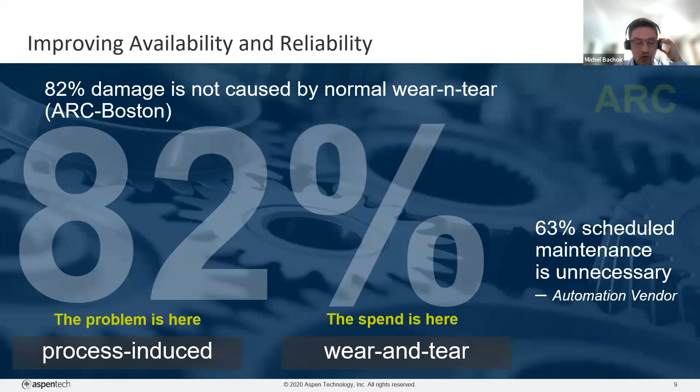Furthermore, it has been suggested that 63% of maintenance is unnecessary and can cause more damage than if the equipment was left untouched. Another way of visualizing this is by looking at this PF curve. The idea is to catch the problem before it reaches the P point, or the point of no return, as I call it. Having a stable operation will minimize equipment breakdown due to process upsets.

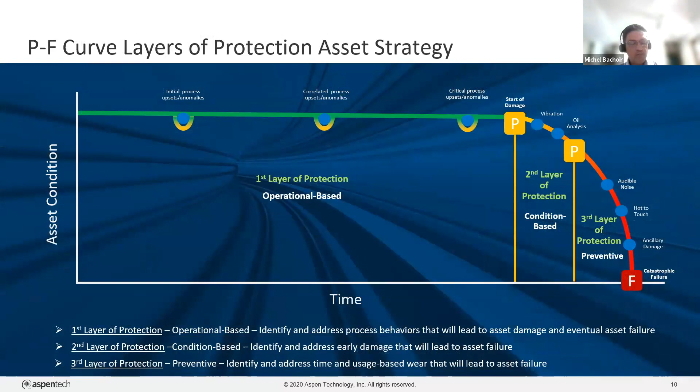How can Mtell alert you that these issues are happening? Mtell uses agents. Agents are automated software components that perform machine learning. They look for specific patterns in data that show normal and failure behaviors. They will alert when changes in these behaviors occur. For example, we have the anomaly agent, which learns what is normal and alerts when the sensor's pattern behavior is outside this normal. On the other hand, we have the failure agent that learns a specific signature and provides early warning when the pattern is identified.

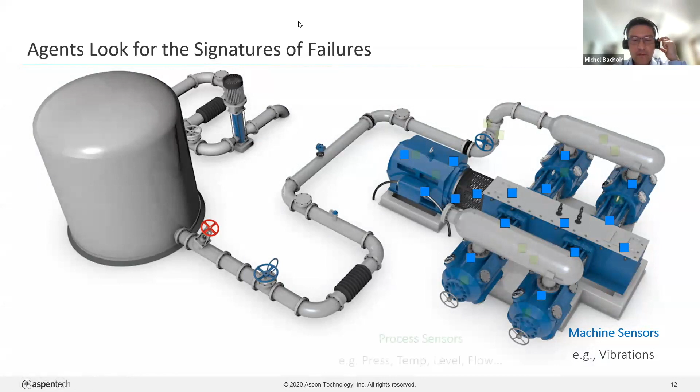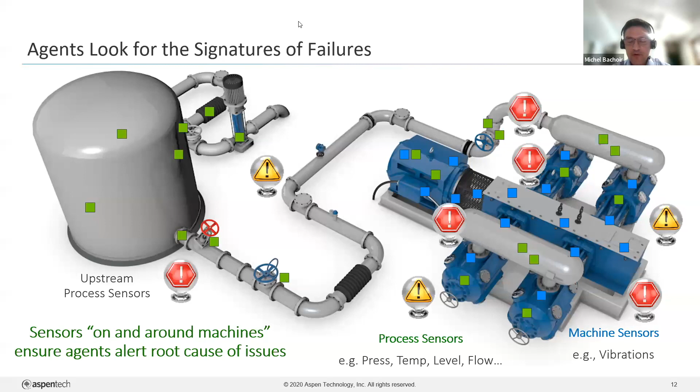So how are these agents created? Mtell uses machine sensors, process sensors, as well as upstream sensors in a holistic approach. Then Mtell gives you the flexibility to create groups of sensors to target specific areas of your equipment, such as the motor or the cylinders, or even equipment upstream. With those groups, you can create and train failure agents to protect your equipment from various known failure modes, and anomaly agents to protect against any process upsets and never-before-seen failure modes.

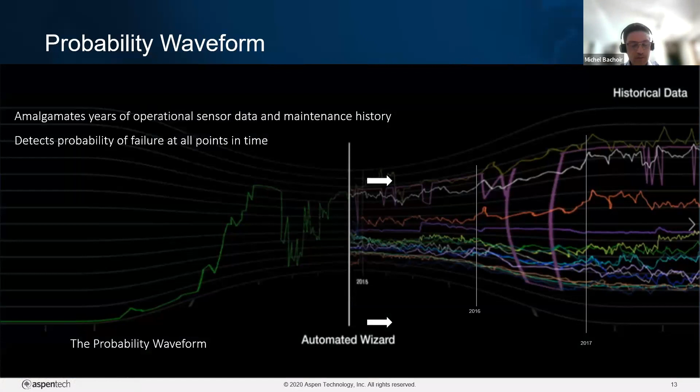So this is the approach of Mtell. Mtell amalgamates sensor data to create a probability waveform, as you see on the left. This waveform shows the probability of failure at any point in time.

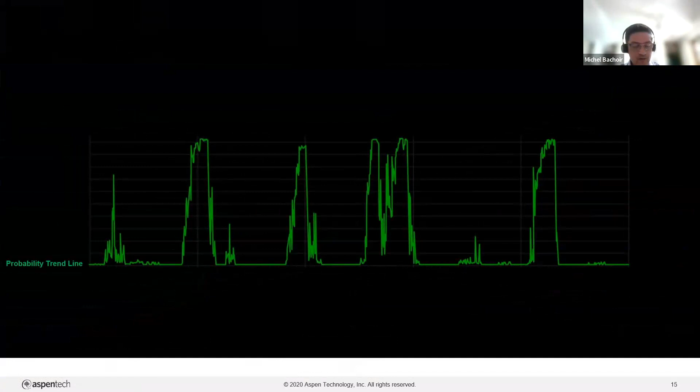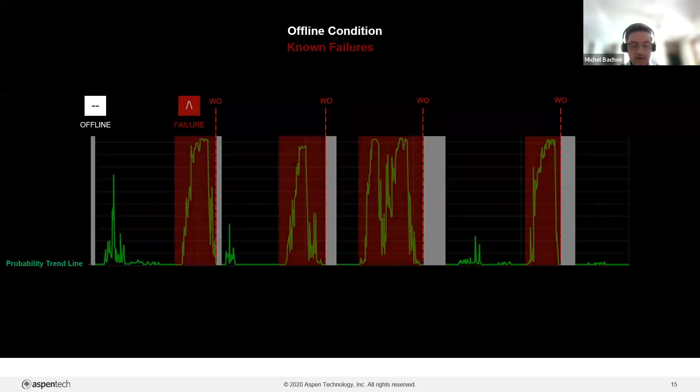So with this waveform, I will quickly explain how agents are created, to see how easy it is. First, the wizard identifies all offline conditions. Then Mtell overlays all recorded events that caused a failure in the past. For each of these events or failure modes, Mtell creates failure agents to watch for specific signatures. These signatures are multivariate and behavioral patterns that humans cannot see that lead to recorded events.

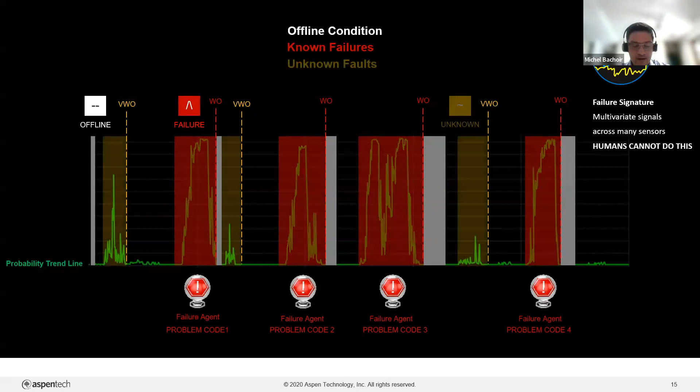Then, with all non-recorded events or unknown faults shown as spikes, Mtell labels those events to remove all abnormal conditions. Then after removing offline, failure, and unknown conditions, what remains is the purest form of normal behavior. This normal behavior can include seasonal conditions, operating campaigns, batches, startups, etc. With this data, Mtell will create an anomaly agent that will monitor and alert when the equipment is outside of normal operating conditions.

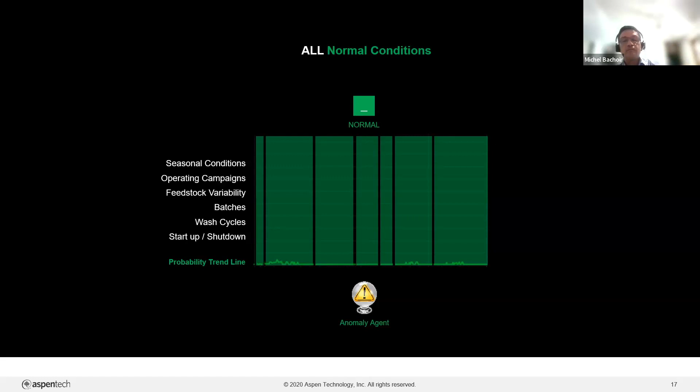Once the agent is deployed, it will monitor live feeds in real time. So if the agent detects an abnormal behavior, it creates an alert requesting an inspection, providing prescriptive guidance. This prescriptive guidance is provided through sensor contribution and an FMEA library.

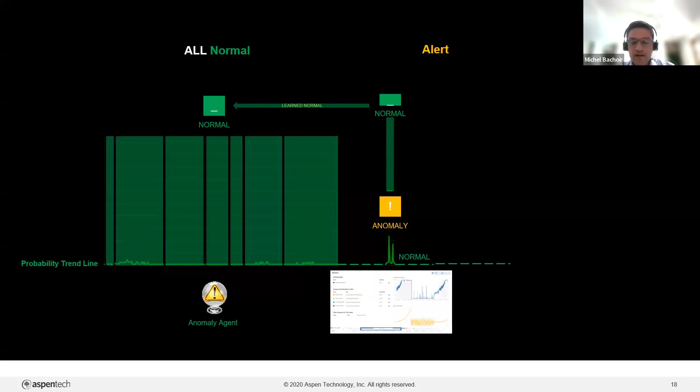If after the inspection it is determined that the abnormal behavior is a new operating state, the user can close the alert as new normal, and then the pattern is added automatically to the normal baseline and no similar false alerts will occur. This literally takes just a second, so it will adapt and learn as time passes by. However, if a new failure is identified, a failure agent can be created. This improves the accuracy of the agents, and also improves the protection of the assets.

In predictive analytics, you may have heard about models. Models focus on the equipment and can only see degradation when it has already started. You may recall the P point in the P-F curve. At that point in time, there is not much improvement over mainstream condition monitoring techniques. Models also require extensive calibration every time there is a process or operational change. And most of the time, this calibration needs extensive data science knowledge.

On the other hand, Mtell focuses on the failure pattern, which provides much more accuracy and longer lead time. You will not only be able to know of an incoming failure, but you may avoid the failure altogether. This may sound a bit complicated. However, Mtell uses a technology that allows anyone on site to be able to create agents. It democratizes the use of artificial intelligence in your mine site.

Most vendors that claim similar capability charge per model, asset, or tag. Mtell is offered as a site license. It means that you can cover all your assets within a short period of time with the same personnel and the infrastructure that you currently have.

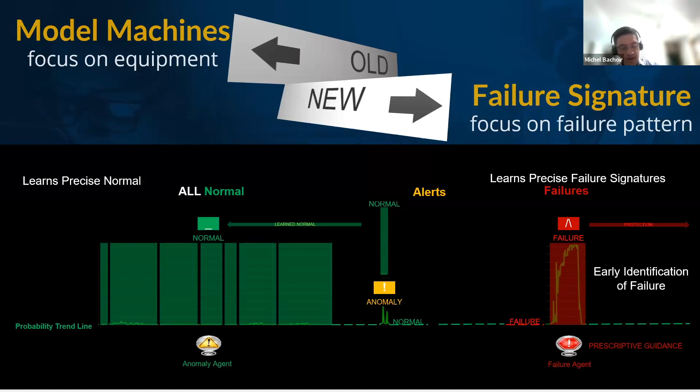So in summary, Mtell learns from historical patterns and uses machine learning and neural networks. It will provide the longest lead time and highest accuracy with minimum false alerts, which is very important for the user. If you have too many alerts, the user may not pay attention to them. It is agnostic because it focuses on data. It can be used on static, rotating, or mobile equipment in any industry and any failure mode.

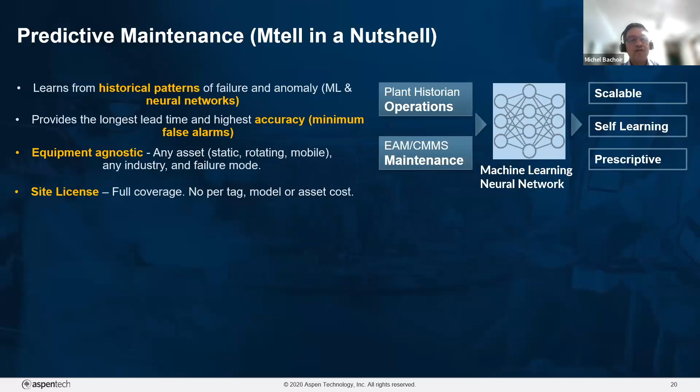As mentioned before, it's a site license, so you have full coverage with no extra cost, no cost per tag, model, or asset. It's very easy to use. You can deploy the agents very quickly, and it gives complete ownership to the customer. No data science knowledge required. Training will only take 3 days.

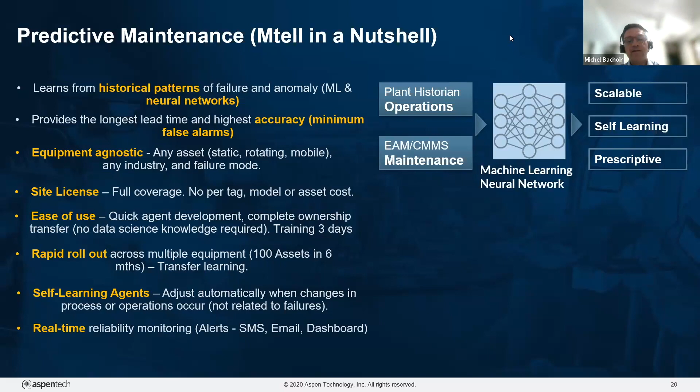You can roll out very quickly in hundreds of assets and even do transfer learning from one asset to a similar asset. The agents will self-learn, which means they will improve and adapt to process and operation changes without resorting to extra resources. And it will monitor in real time. So only when there is an alert, you will receive an email or an SMS, or you can see it in the dashboard.

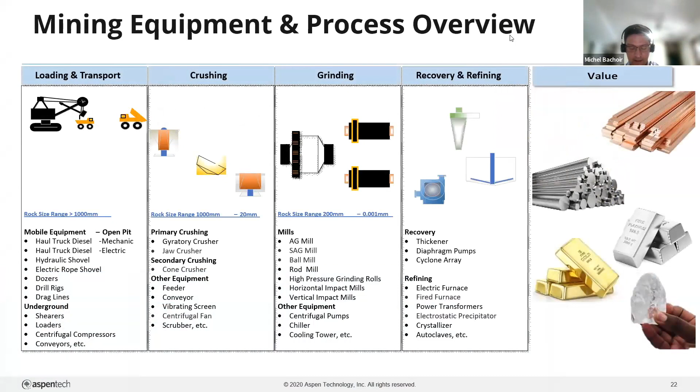So in mining and metals, we have applied Mtell in these assets; however, this list is not exhaustive. And just as a use case to finalize this, Mtell has been deployed at Evolution Mining. The initial deployment was done by AspenTech on 10 assets in just 3 months. And then the Mungari team scaled to 31 assets and created more than 100 agents.

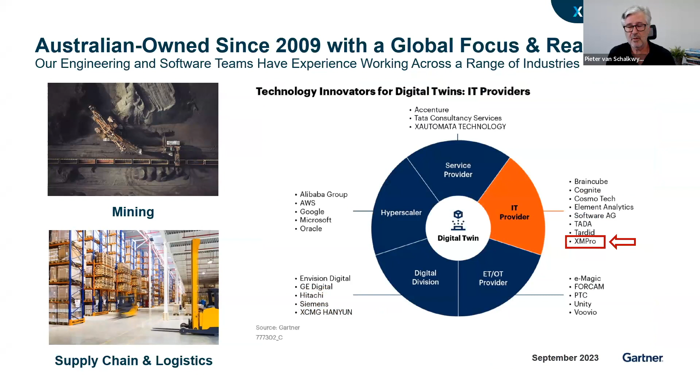And when you get this right, this is a soft rock miner in Canada that wanted to reduce long conveyor downtime by 30%. One of the problems they wanted to address was 80 kilometers of underground conveyor, and over a 5-month period they had an additional 44,000 product tons.

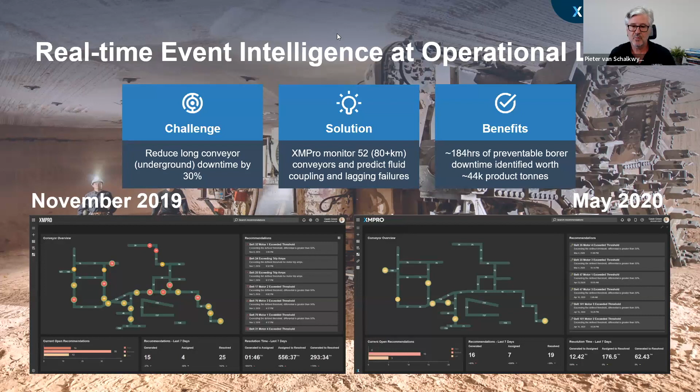The digital twin that we created was not a high fidelity, very complex model. This is almost like a London Tube model, a view of the conveyors as you stand on the surface and look down. You can see the impact of providing real-time event intelligence or decision intelligence and enabling subject matter experts to act on recommendations.

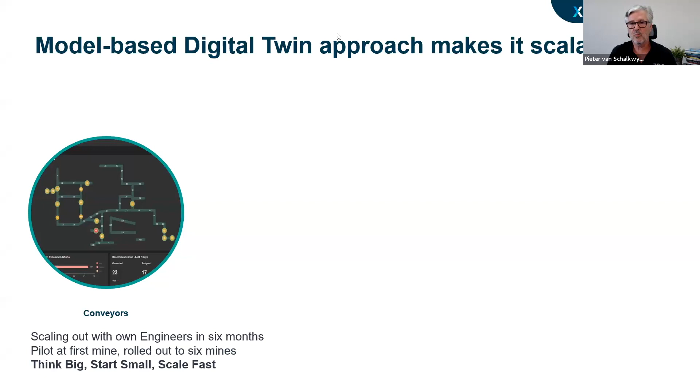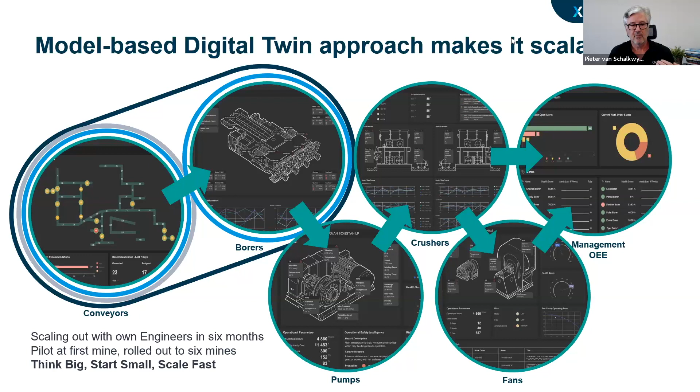The key thing with this was it was piloted at the first mine and then rolled out, and that's the whole benefit of a digital twin approach, which is all model based. So it's not a single application, but I can take the same approach to borers, pumps, crushers, fans, and then start adding more capability, making it more composable, which I'll talk about in a minute, and even add more capability like computer vision on conveyors, combining these so that I create a digital twin of underground if I've got the conveyors, borers, hoists, and those kind of things put together. So for us, it's about think big, start small, scale fast in all of this.

It's not just at the operational level. Sometimes a GM of a mine would want to see something in terms of the operations in a very similar way.

And someone's moving my slides. It's not me.

So I'll just go back one slide. So a GM of a mine may want to...

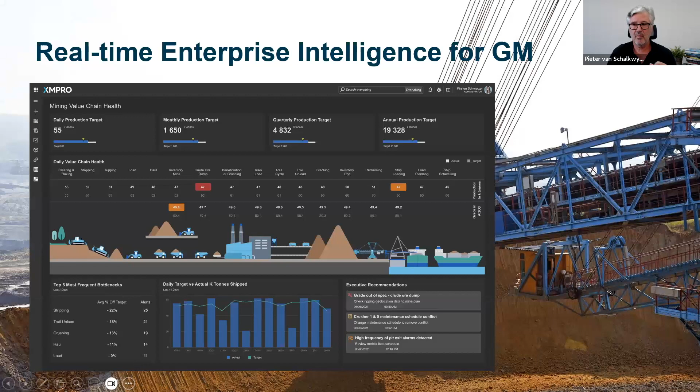There's definitely someone moving slides around. So it could be at operational level as well.

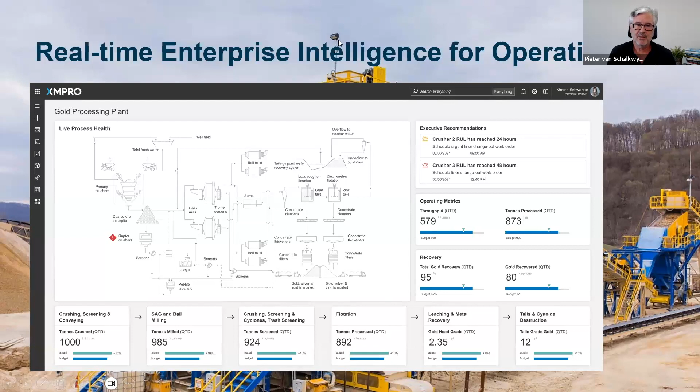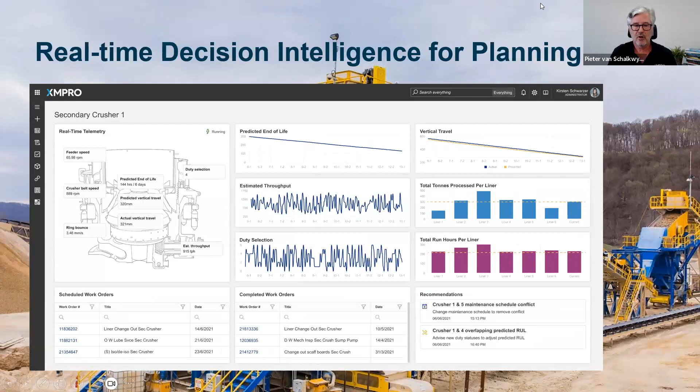I can see, for example, that I have issues on a crusher, and I can drill down to that, going from an operations level into a planning phase where I can look at end of life. Not just that information, but combine it with work orders and other relevant information that might be applicable. So our view is not on just a single point solution that addresses a specific area, but with digital twins, the whole value is that you can do this across the whole value chain, across key areas.

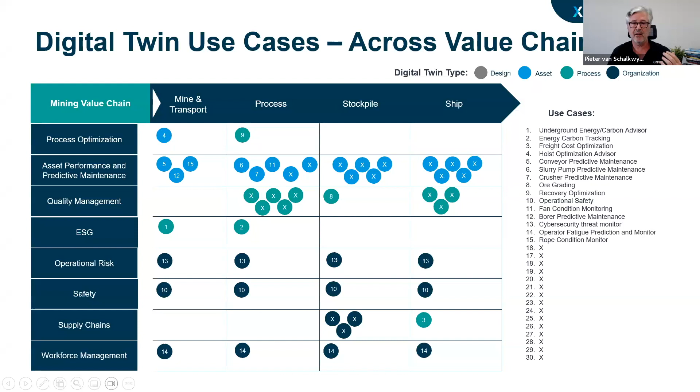And you can see these are all use case driven. There might be templates, accelerators, blueprints that we provide, but there are also unique areas where you want to use the same approach and build that. Those are what all the X's are - specific bad actors or specific areas, specifically around ESG and other newer topics that require that.

So for us, the way to do this is through what we call intelligent digital twins. They are typically integrated, intelligent, interactive, and composable, like the kids' Lego bricks. You can build the blocks together. That's what makes an intelligent digital twin.

If I look at how we do that inside XMPro, we start off with what we call our data stream designer in step 1, which is where we do all the integration. We can add intelligence either in step 2 or step 3 with AI and our application designer, and also recommendations where we close the loop on what needs to happen.

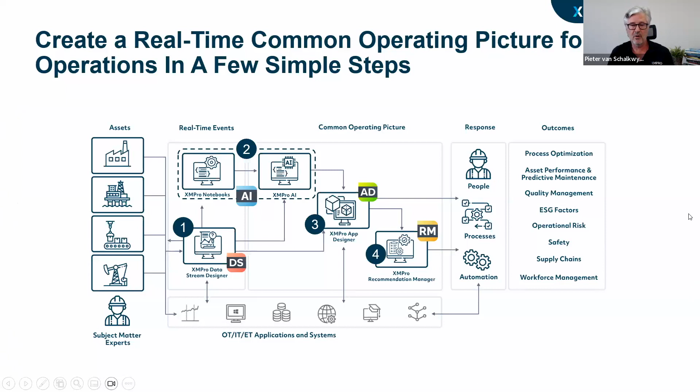Just very briefly, this is where 80% of the work happens for us. This is a visual way to build out those real-time data streams, connect, make it integrated. You can see agents on the left-hand side where I bring in either listening to certain data sources where I can wrangle all the purple items, the red items, bringing in context like make, model.

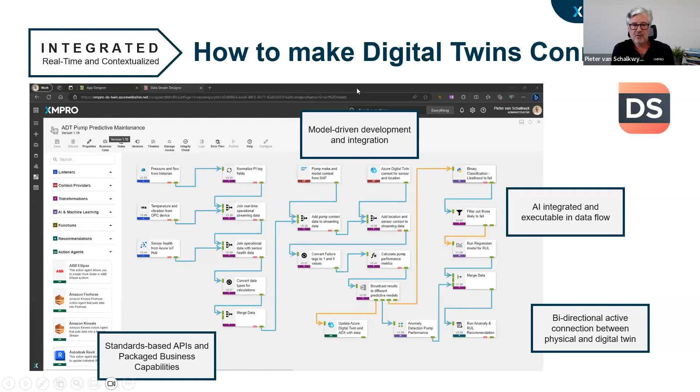I can do calculations, update existing or external systems, embed AI, and also create or run recommendation rules to identify how to improve this. Again, this is 80% of the work that happens underneath the surface of an intelligent digital twin, and it's all driven in a visual way.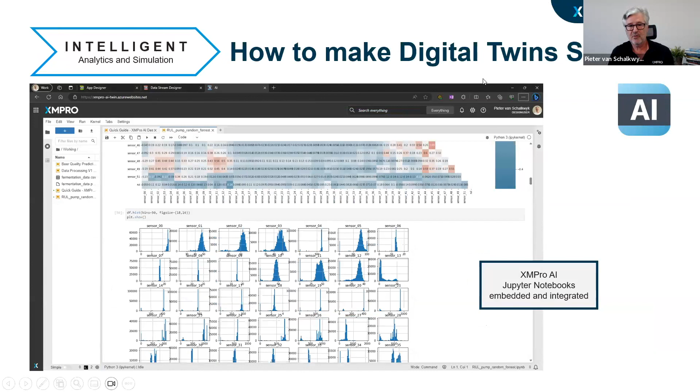On the AI side, Jupyter Notebooks embedded, and I can bring intelligence. This is wired into our data streams, so it makes it really easy to do some of the specific analytics.

When we look at the front end side of things and we want to create nice visualization, this is Unity, but also in the middle with a pump there. But on the Copilot side of things, you can bring generative AI, large language models that are specifically trained on your assets, your information, and you can see that on the right-hand side.

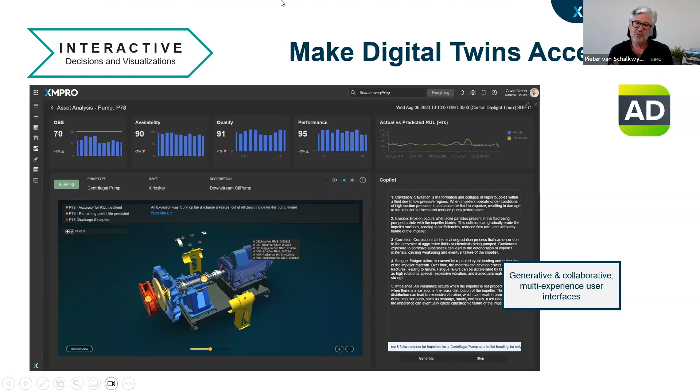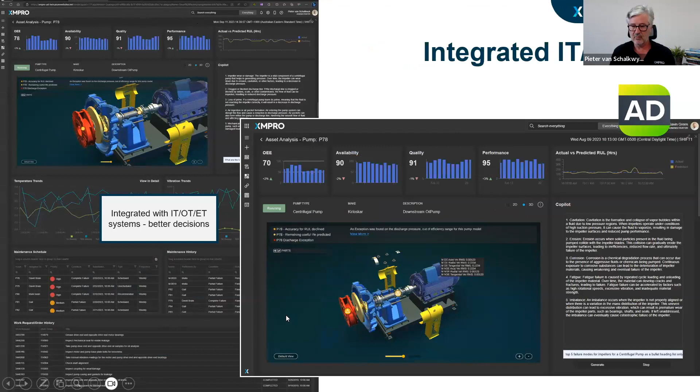And it's not just these newer type things like fancy graphics and AI, but also on that same one, I could have maintenance schedules, maintenance history, work order information, all the decision intelligence that I need around what do I need to do next, and how can I best respond to something. And that's where recommendations come in.

So now I have a recommendation on terms of what to do next. I can do triage, I can see how many times, and also I can mark false positives, which is a really important part of the whole thing.

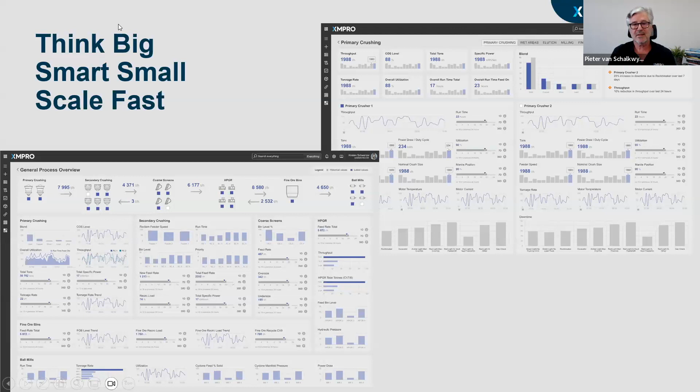So in closing, for us, it's about think big, start small, scale fast. You can build some pretty comprehensive solutions, but it's all driven in order to create intelligent mines. It's not about point solutions, but it's about making it integrated, intelligent, interactive, and through all of that, help you to operate your mine at its full potential.

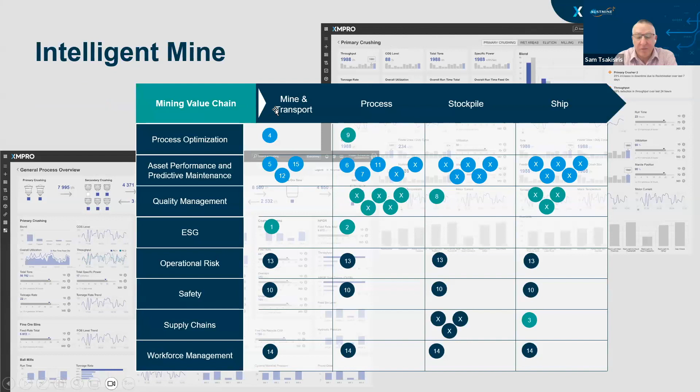Great. I'm going to start moving the slides over. That's your final slide. That's my face there. Hi, you guys. Thank you for joining us.

Today, I'm going to be talking about what the intelligent mine is from the AVEVA perspective, with a focus on AVEVA Predictive Analytics as one of our key solutions. So first of all, a glimpse into AVEVA. AVEVA is a global leader in industrial software. We provide industrial on-prem, hybrid, and cloud platforms and applications that enable the business we work with to harness the power of their information and improve collaboration. We have over 20,000 industrial customers in over 100 countries with 2 million licenses installed. We enable teams to engineer efficiently, optimize operation, which help them drive growth and sustainability. We have over 50 years of innovation, and AVEVA holds a leading market position in diverse market and industrial software sectors worldwide.

When we're thinking about mining specifically, we can see that 10 of the 10 top leading global mining companies use many products from AVEVA. We are in over 400 mining sites around the world. And these companies have been using our AVEVA systems to drive hundreds of millions of dollars of value from solutions like production management, the PI system, predictive analytics, mobile operator solutions, engineering solutions such as asset information management.

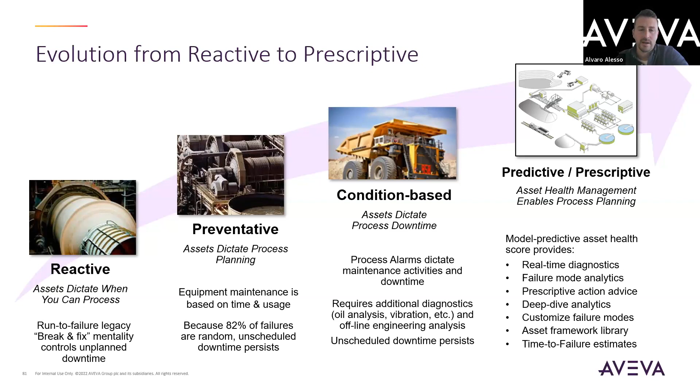So when we talk about these kinds of solutions and dealing with OT data, we need to think about a data platform. And for AVEVA, that is the PI System. And the PI System is this real-time OT data platform that allows us to turn data into decision-ready information. We're going to have, of course, our historian piece, which is the data archive, where we store and access these massive amounts of data. And then we're going to have different components that allow us to enrich that data right there at that layer. Number one, the asset framework that allows us to set up and add subject matter expert knowledge to that data, asset structures, metadata, serial numbers, manufacturers, everything that is going to help us for all the other applications we want to connect to this source.

Then we're going to have analytics where we can transform that data into actionable KPIs that address the problems and the areas where we find value. We're going to have event frames which help us pinpoint the start and end times of where certain conditions are met, and finally notifications where we get those alerts turned into actions.

So when we're talking about predictive analytics, we're talking about an ML AI enabled layer that sits on top of that system. Could be the PI System, could be another historian for that case, where we're making use of that historical data. We're storing predictive values, we're storing health indications so we can do further analytics with it. We're making use of that asset framework hierarchy and the data taxonomy and making use of all that tag mapping that we've done before and unifying that namespace across my operations.

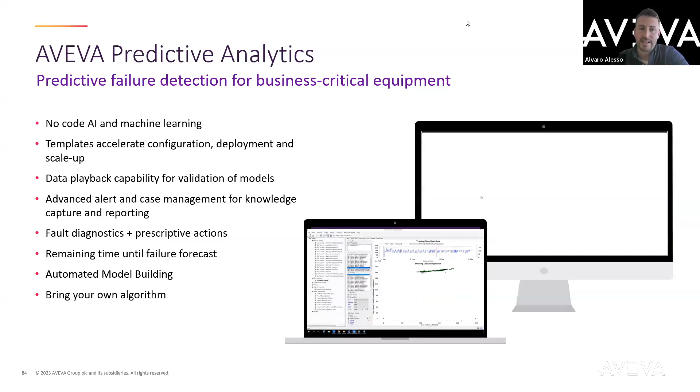So what is predictive analytics? It's essentially a no-code AI and machine learning application for failure detection and performance degradation for business critical equipment. It's meant to be used by subject matter experts, with two clients. One is where I process my alerts. The other one is where I configure my models, and it has the ability to play back on existing data so I can validate my models before I deploy them. And more importantly, it has an advanced case management tool that allows me to take action and have conversations internally with my teams.

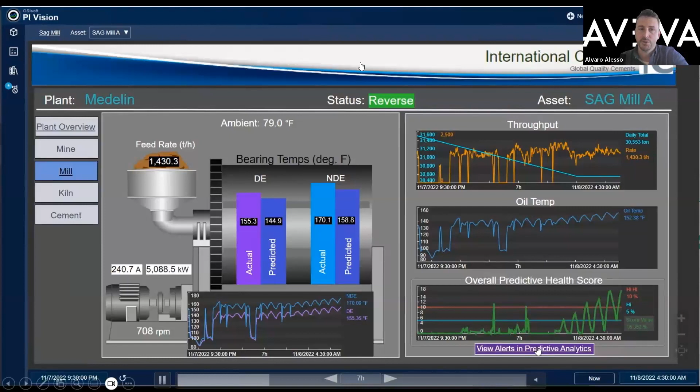So this gives me the first alert where I need to go to predictive analytics. It has a high performance integration with it, just takes me to that page and I can start processing these alerts right away.

I'm going to see an asset health degradation score, what we call overall model residual, going up. This little chart here tells me what are the sensors that are the heaviest contributors to that anomaly. I can see here that I'm having a temperature issue with my drive end and my non-drive end. All of that data being taken from Asset Framework, as we saw before.

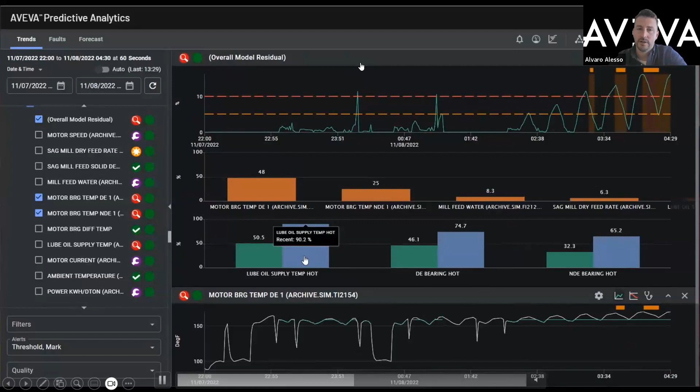I can deep dive in sensor behavior to understand whether I have a sensor issue, whether I have a problem across all my tags. I can quickly visually compare before I realize that I have a specific problem, right? A diagnostic. And this is where the tool gets prescriptive. It's showing me the likelihood of the occurrence of each failure mode.

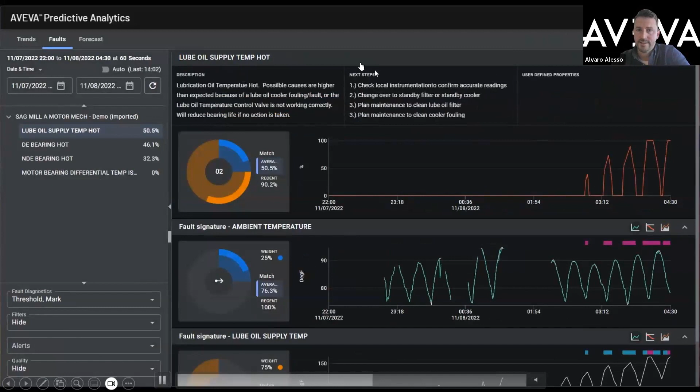When I click there, it takes me to the second tab, the faults view, where I can see a description of the problem, the next steps, prescriptive steps, and I can even forecast what's the likelihood of occurrence of this problem in a certain time frame. I just grab the tag and start simulating, and I can see there's a very high probability of occurrence within a day. So this tells me I have to take action.

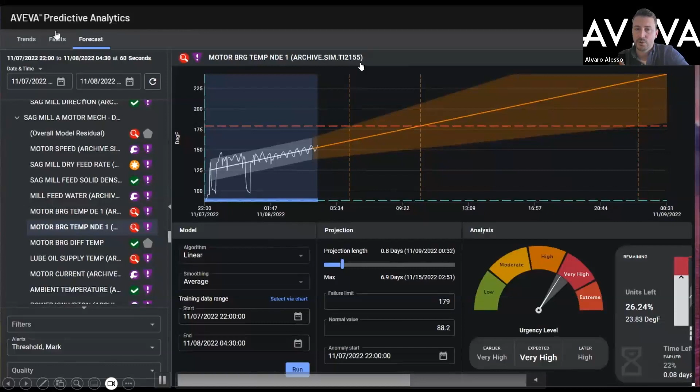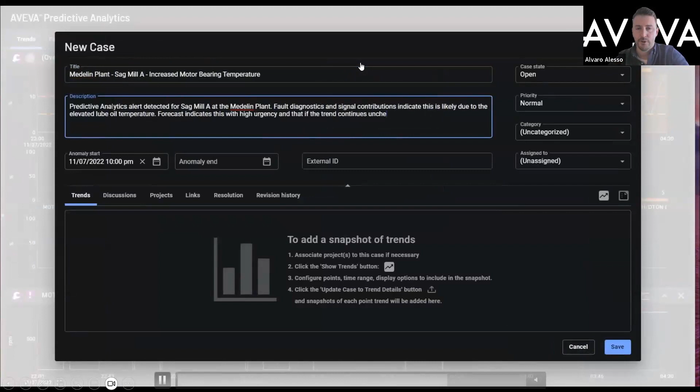So this is when the case management tool comes into play. I just go generate a case. As a monitoring analyst, I know that this is an equipment problem. I'm going to assign it to a maintenance team on site. I'm going to describe it, put a title to it, maybe attach a snapshot of the trends. I can attach documents, CSV files to facilitate further investigation by the SMEs on site.

I'm going to type here what I need, assign it to someone, and then when I save, it creates a predictive alert that can be reached from site. I can even connect it with my ERP, EAM system, and the people on site will see exactly what we're seeing on screen. A list of predictive alerts, reminding that the machine is still working, and this is where they're able to provide feedback.

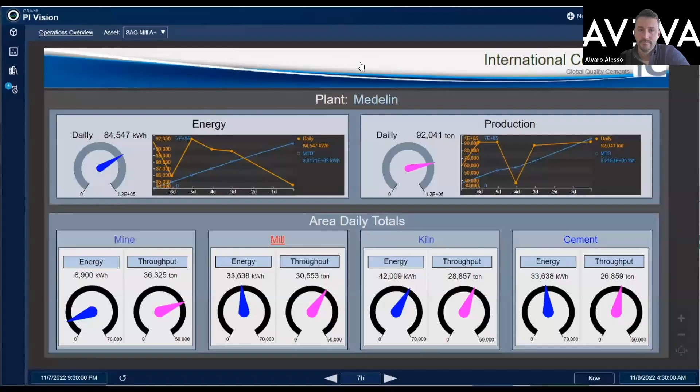So we've done this for many customers around the world, even here in Australia and even in the mining industry. Rio Tinto is one of those where we've deployed a program of models that is serving now many plants, more than 300 assets, creating savings in the order of millions of dollars, SAG mill motor failures, performance issues with pumps, and the ability to templatize these models is what's really helped Rio Tinto deploy this at scale.

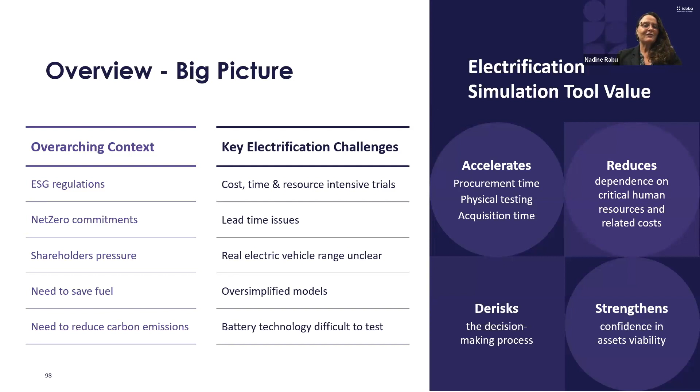This is where we come in. Our solution is not the silver bullet, but the accelerator towards it. That accelerator is an OEM agnostic simulation tool, which is currently at the proof of concept stage, to help streamline basic asset design, accelerate and de-risk the decision-making process, reduce costs, and provide confidence in choosing the right asset for your specific needs.

We deliberately chose to keep the initial phase of the proof of concept simple, and we decided to start by replicating a day in the life of a single vehicle, the popular Volvo L120, traveling up and down a mine shaft in a 12-hour period in a partner mine, comparing a diesel version and a battery equivalent version.

Obviously, in 7 minutes, we are not going to go into the details of how the simulation tool works. And I suspect many of you might actually switch off if I tried this. So instead, a picture tells 1,000 words. So I will now show you a brief video of the actual simulation tool in action.

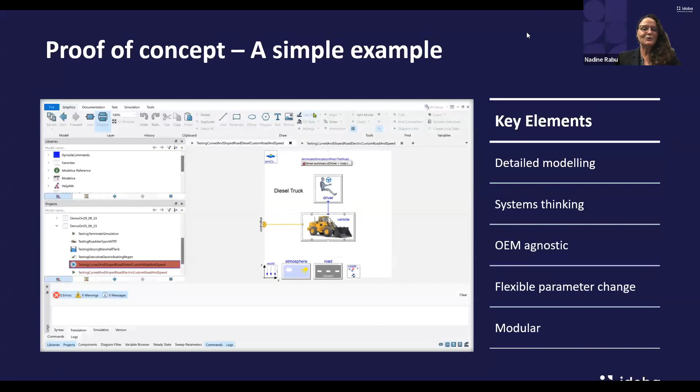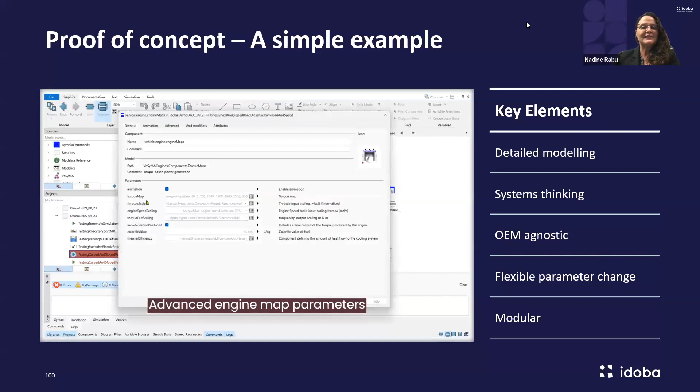We started the simulation with a diesel truck model with its driver, environment, road components, and all essential vehicle components. The driver is actually modeled to sense the road and plan when to turn, accelerate, or brake, while the vehicle component is modeled to represent the real diesel truck. We applied a system thinking approach throughout to reflect how all parameters are connected and how they affect each other, and to help improve accuracy. Of course, although we did use numerous parameters in this simulation, more complex modeling of the engine component is available.

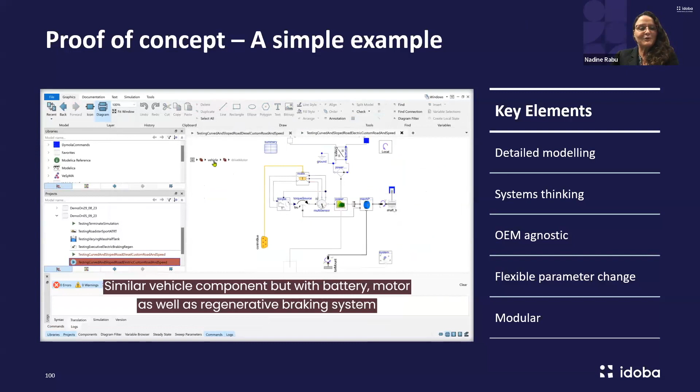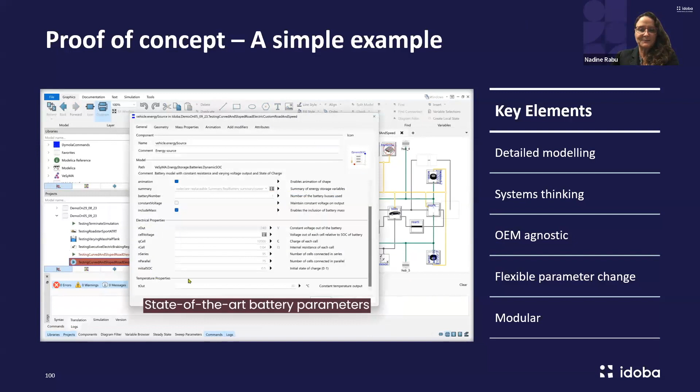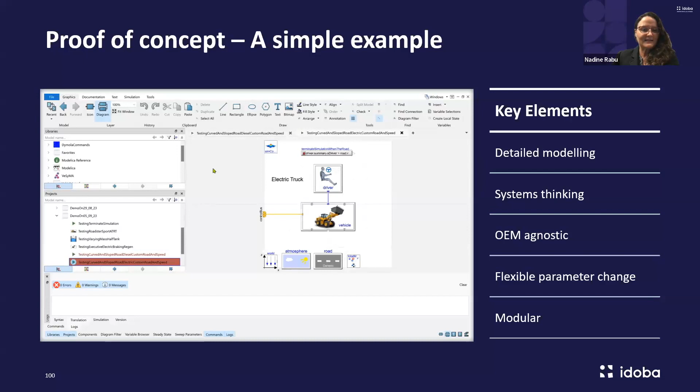And after we modeled the diesel version of the Volvo, we then moved to its electrical version. We used the same external parameters, but this time the Volvo was equipped with a battery, electric motor, and a regenerative braking system. So you might be thinking that this is all well and good, but what does this simulation actually tell us? Well, we chose to focus this initial phase of the proof of concept on a few specific outcomes, comparing EV to diesel energy consumption in real time, which you can see on both graphs at the top. This example also gives us a simple representation of uphill versus downhill, with a portion of the graph in green showing downhill and in red showing uphill.

While it is not shown here, CO2 emissions as well as diesel particulate matters will be derived from this data. Also, similar to the engine components, a more advanced and complex battery can be modeled. And finally, an impressive 100,000 or so equations were used to solve the model, so not quite what that good old Excel sheet can do.

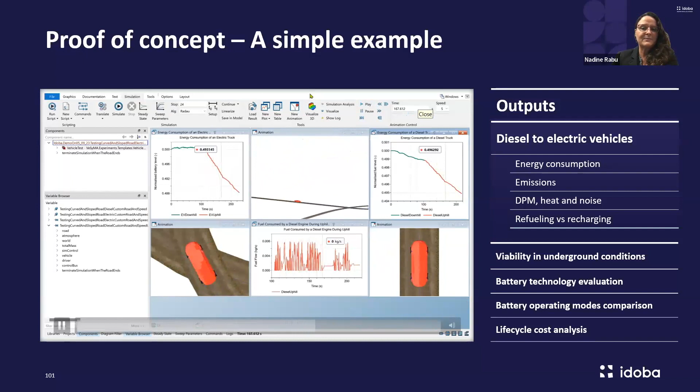In the next couple of weeks, these simulations will be further updated based on actual terrain data, speed profile, any sensor data we can obtain on the operating environment, and the payload carried up the hill. We will then expand outputs to include elements such as DPMs, heat, the impact of further environmental factors, the impact of refueling versus recharging, and life cycle costs. And as we gather more data from the battery OEMs, we'll then also be able to do a real comparison of the various battery technologies and their impacts on the asset's productivity. And this is only the beginning.

Looking at a vehicle in isolation is clearly not sufficient, and a systems thinking approach is absolutely necessary to deal with the complexity of a mine, given its high number of vehicles and vehicle types. Central to all our simulations are, of course, the impact on productivity and on whole of life costs. We're now actively working on increasing the model's complexity to truly simulate the conversion of an entire mine. Our next planned modeling phases will look at the impact of the electrification of an entire fleet, and then of the mine as a whole, from a mining productivity, mining planning, and equipment maintenance optimization perspective.

The simulations will in particular help determine which assets to electrify as a priority, how, when, and where to best recharge, taking into account all other electrified and non-electrified assets on site; develop predictive maintenance to anticipate maintenance needs and reduce downtimes; support battery life extension programs to ensure batteries are operated within their optimal range; and assess the mine site's electrical infrastructure to accommodate the increased power demands and recommend necessary upgrades.

Of course, core to these simulations will be to ensure that mining operations run efficiently, reliably, and cost effectively, while considering the total cost of ownership throughout the asset's lifespan. This approach will help promote sustainability, reduce operational risk, and maximize the return on investment for electrification initiatives in mining.

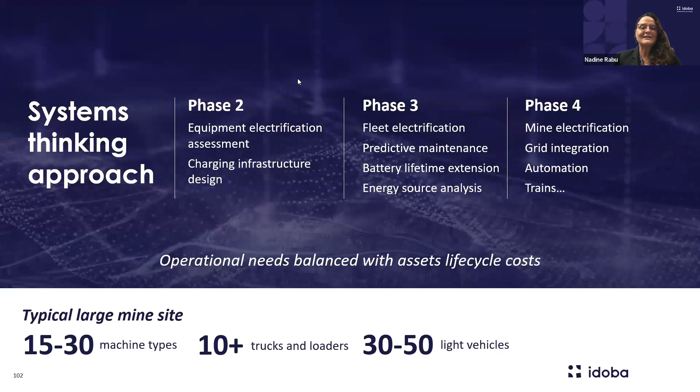So, to conclude, relying on lengthy trials, OEM-specific tools, and basic spreadsheets risks being costly in time and resources, and risks misrepresenting the complexity of a real mine. This could then lead to the wrong assets being electrified, the wrong battery technology being used, or the wrong operating modes being put in place. So if you would like to see a glimpse of what your mine could actually look like in 2025 and beyond, and if you want to de-risk your decision-making process to get there, come and sit with us and we'll take you on your electrification journey.